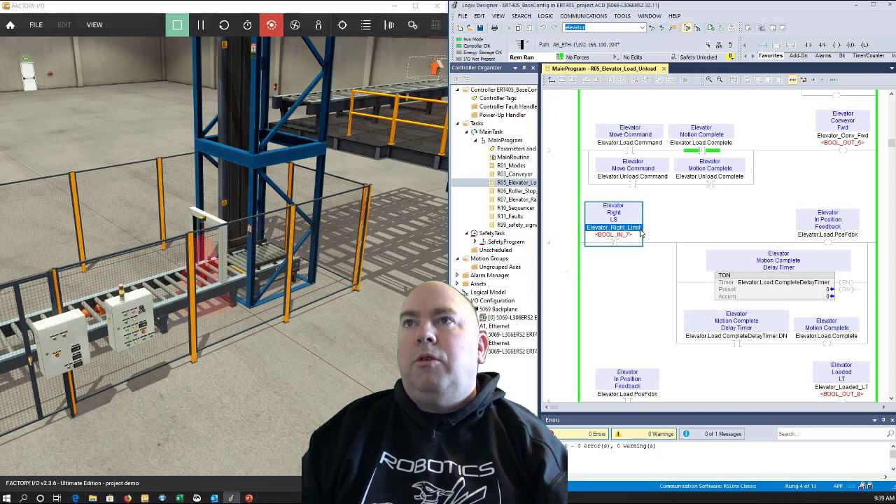Okay, we're going to finish this off here. So, a couple problems that I had that I've sorted out kind of offline. I was messed up on how to do the elevator load position feedback. I was looking for two switches here, the elevator right and the left limit. My problem is, bring this pallet in here. The pallet only makes one switch at a time, so it would not actually make both switches.

So you'll see when I bring this pallet in here, I'm going to do a load, which is this one here. There. I am now load. It is complete. So I cannot run that. I'm actually pushing the load command right now. I have load complete, so it won't let that conveyor, those rollers run anymore.

So where I am there now, now I can actually run this up to whatever position I want to go. And I take it up there, and now I should be able to do the unload. I can do that, but because that other conveyor is not running, it kind of gets out of there. I need to have all the conveyors running together to make this really work properly. Now that should be clear, and then I can bring this guy back down. So that's basically working in manual. So I proved out manual on that.

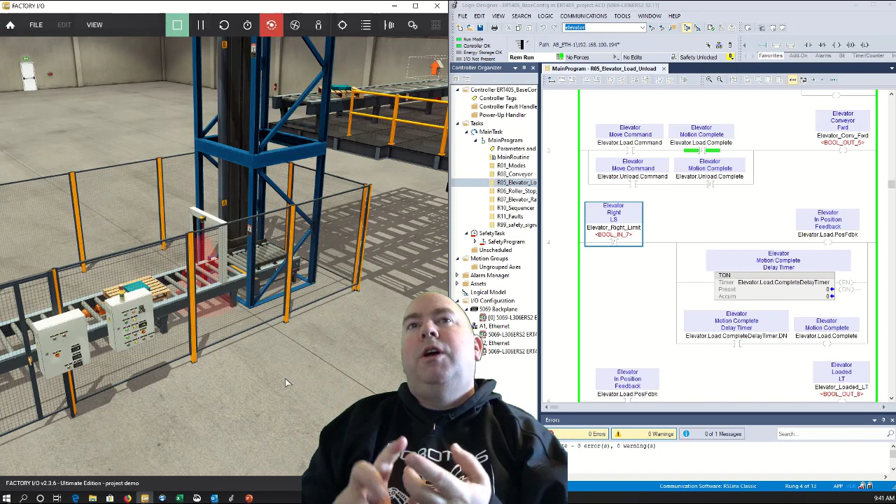So at this point, I've basically proved out manual function. It should be time to say, okay, I basically proved out manual once we've done that. So I've proved out safety. That was the very first thing to do. Got to have safety, because if you don't have safety, you can't shut things off if things go wrong. After that, prove out the rest of your I/O. Make sure what you think is showing in your PLC.

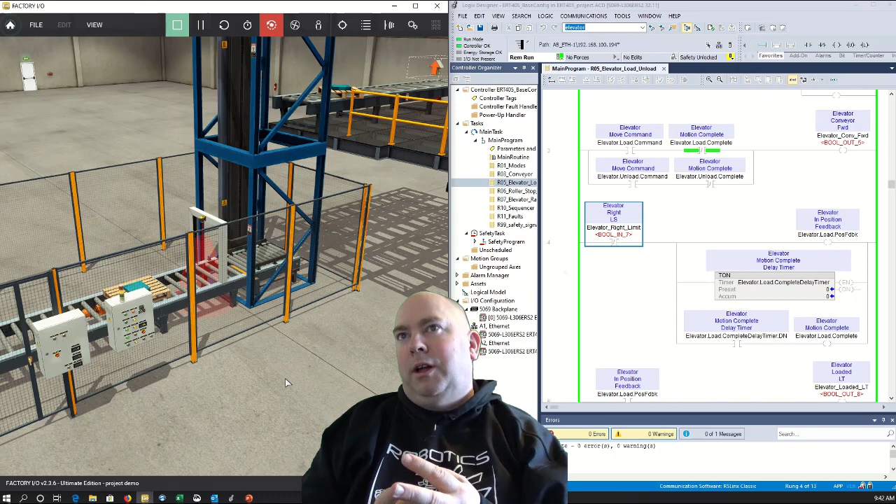So if I say I want to turn this motor on, make sure when I put that onto my PLC, that is what is actually running on your machine. So that's proving out both your wiring and your aliasing in your tags and stuff like that. Then if you can do that, you know all that stuff is working properly, then you should be able to prove out your manual motions, which we've just done. I've now pushed buttons to make everything move, and everything moves properly. I'm getting the right feedback everywhere, so my switches seem to sense properly.

So my next thing I'm going to do, I am going to put this thing into auto and see what happens, and then debug the auto sequence as we go. So turn this over here, green light, that means I'm in auto. I'm going to push auto start. I guess I should probably first of all return everything to home position. So there, I am at home position for everything. Don't know why I still have this light on here.

Let's go check that out. I still have the raised position. The elevator up light is on. Raised position feedback. Alright, so this is

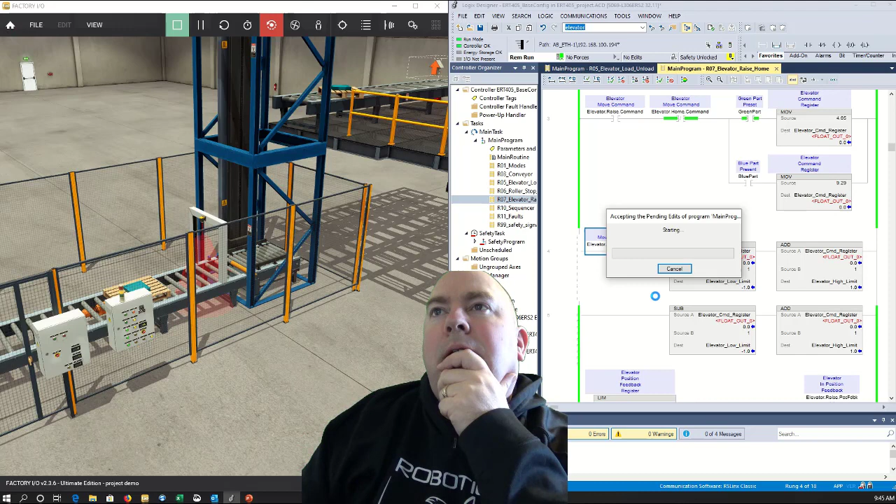That should fix that. Let's just set this to 3 and 5. And then that goes away. Okay. There we go. So that's all good. And now at home position, put this in auto. Auto cycle start.

Alright. That wasn't completely smooth. And we're jammed up now. Alright, that's pretty typical of a machine startup. Okay, so what happened there? Let's see. So as soon as that was in position, let's watch that again. Wait for another pallet to come along here. Okay, pallet releases every 30 seconds.

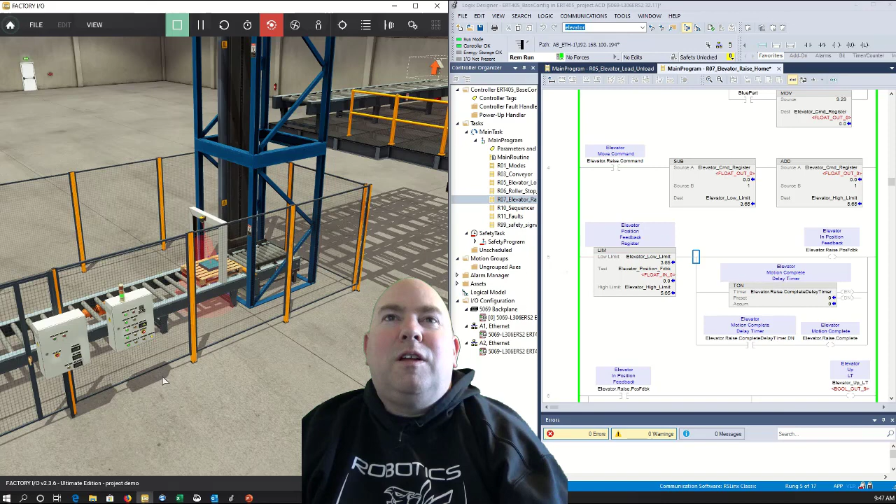So roller stop. Let's set this back to 0. Okay. So we're going to go up. So that started running before we were in position. Okay. So we get our raise position on too soon. So we need to have a time delay on our raise position.

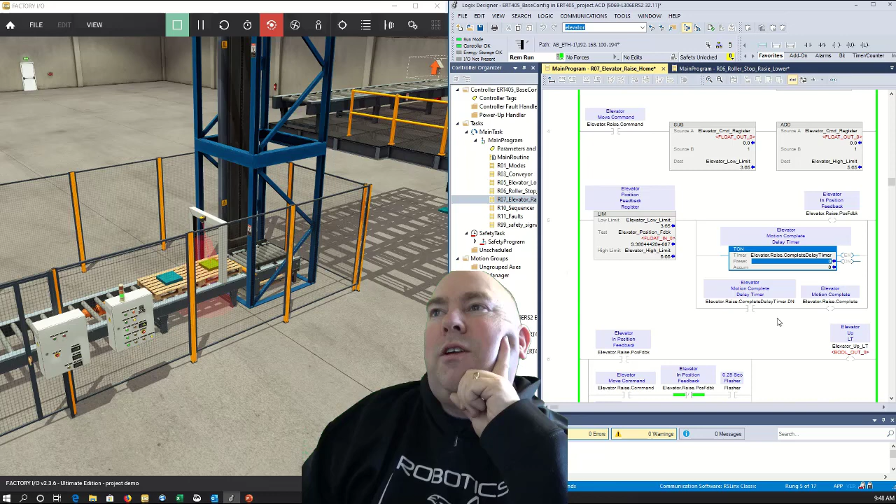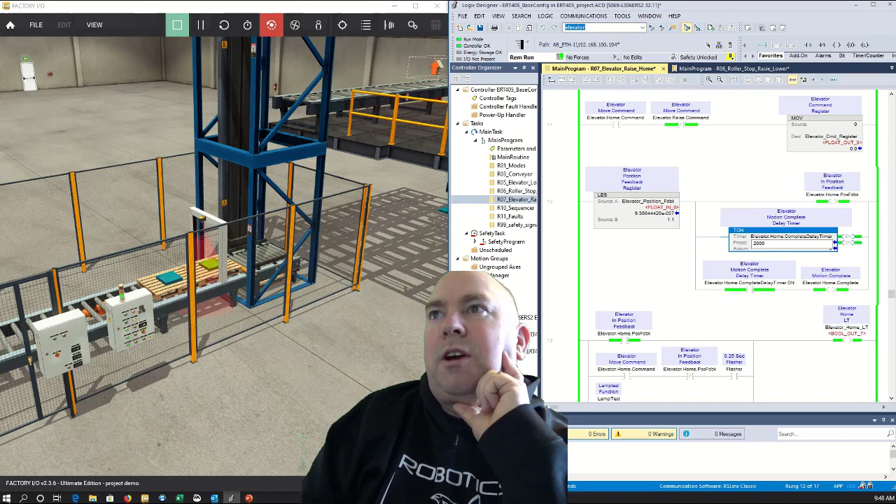Alright, so yeah, we have no time delay here. So let's put like a 2-second delay in there. Second delay on that position. So basically as soon as it got to within that acceptable range, it said we're raised, we're going to start unloading. That's why we have these nice little delays in here. So we're in position and settled.

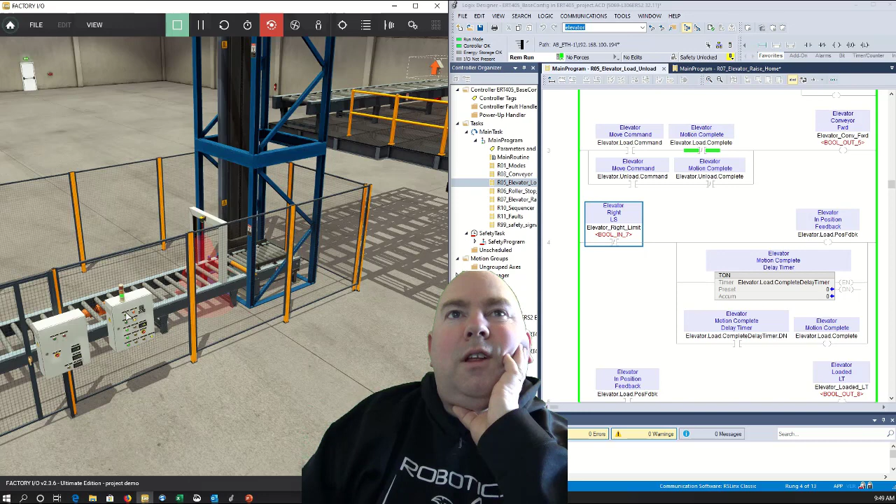Make sure we have a delay everywhere. The load stops, those are already good. Alright, let's try this again. This is machine startup. Figuring out the problems, find out why we're dumping parts everywhere, and figure out what it was, fix it, try again. Hopefully we don't break too much stuff along the way. And right now I don't have part detection logic, so I don't have logic that shows what the

I need to reset my sequence. It's not getting all the way through the sequence either for some reason. Alright, so there we go. 2 seconds. Move up. 2 seconds. Run out, clear. 5 seconds to clear. Run back down. Now we're on step 7. What are we waiting for at step 7? Gantry ungrip. Why is that in there? Elevator home complete.

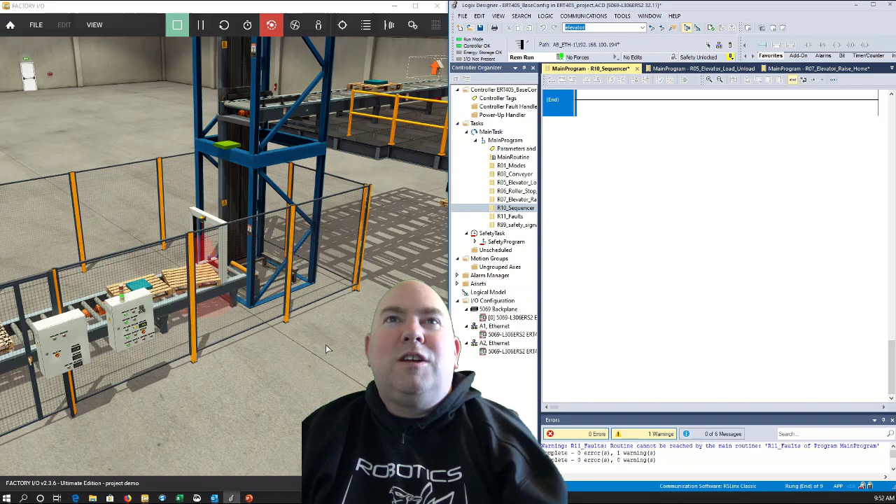You can also see that, yeah, this remover is not in the right position. Pallets are just sliding underneath it. Fix that later. But sequence-wise, this is good. Looks like we got the sequence figured out. That's saying they're just going right underneath that.

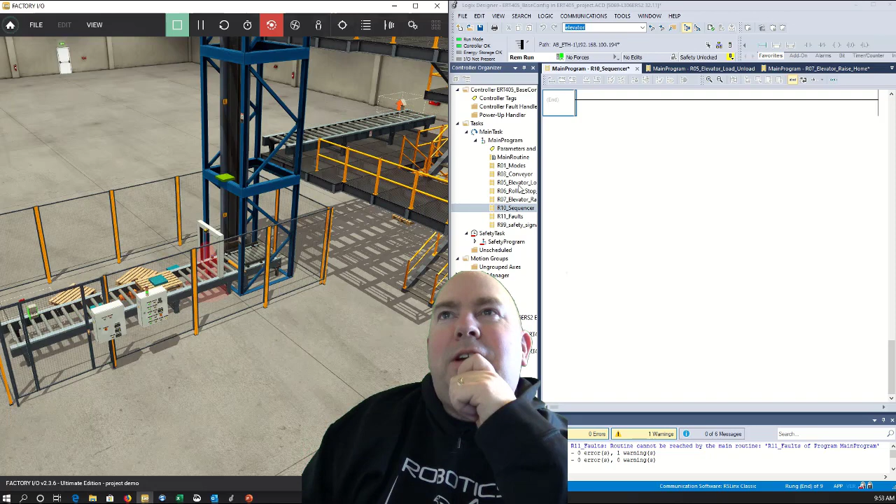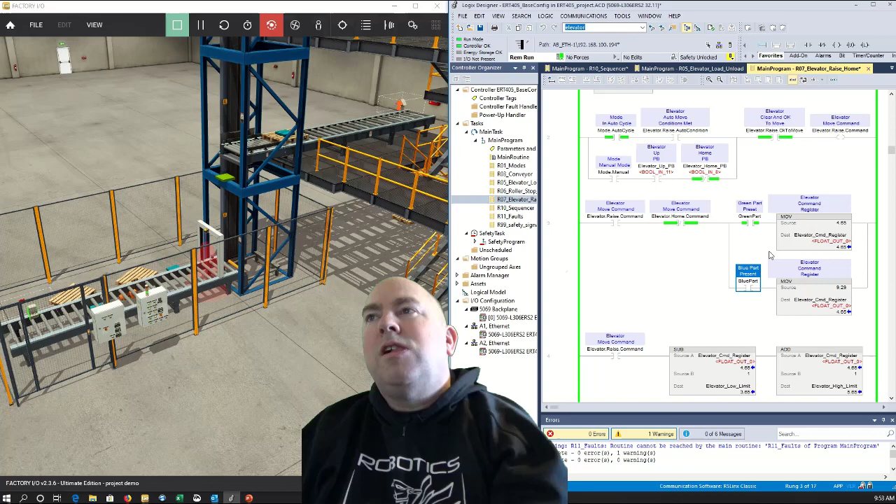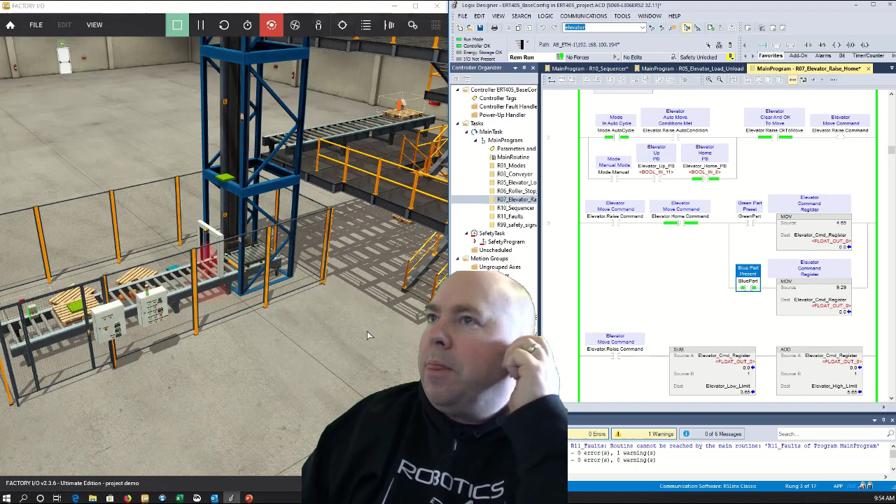Alright, let's change this to say that there is blue part instead of green part. So now this should go to the top level. Alright, so that's running pretty good.

So let's add in our part detection logic. So let's go add a new routine. Let's call this R12 parts. This is very similar to logic we've done before in the other programs. I could just copy from one of those. So we're going to get a blue part.

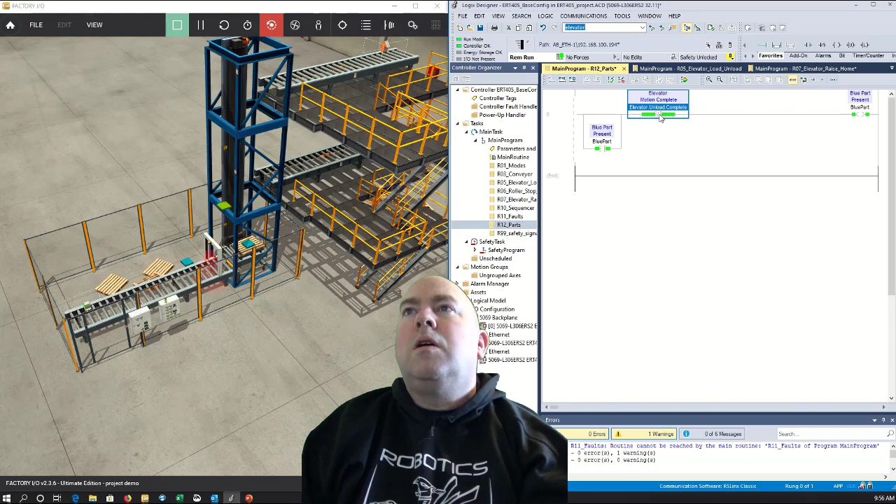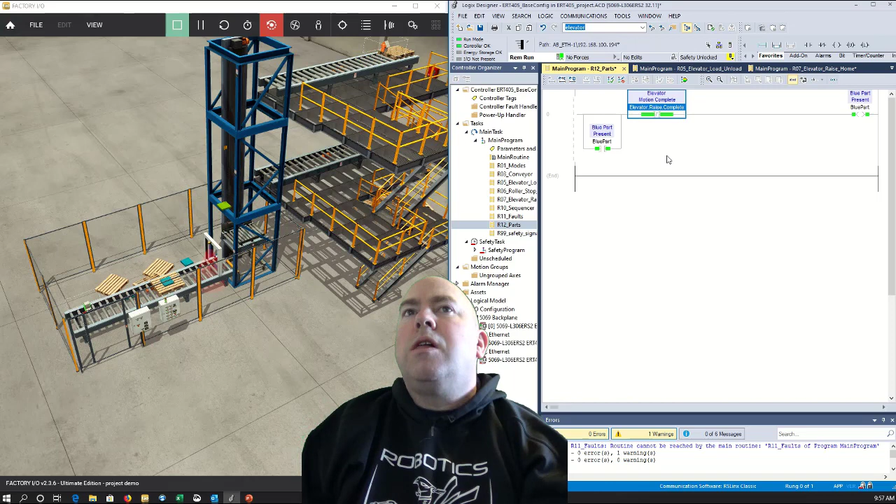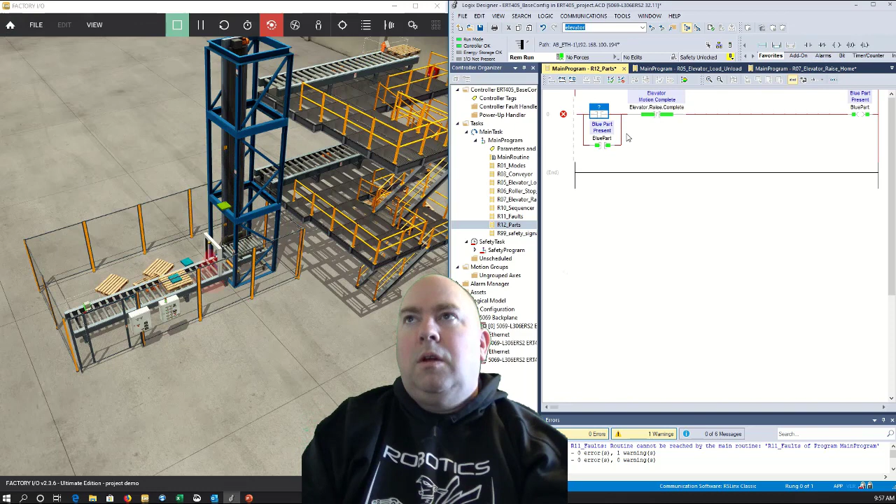So raise is complete, I think. We'll reset this. Yeah, that's good. Okay, so let's look at the bits here. Vision sensor. We gotta figure out what the pattern is that defines blue part. There's 4 bits we get from this. Some of them are on, some of them are off.

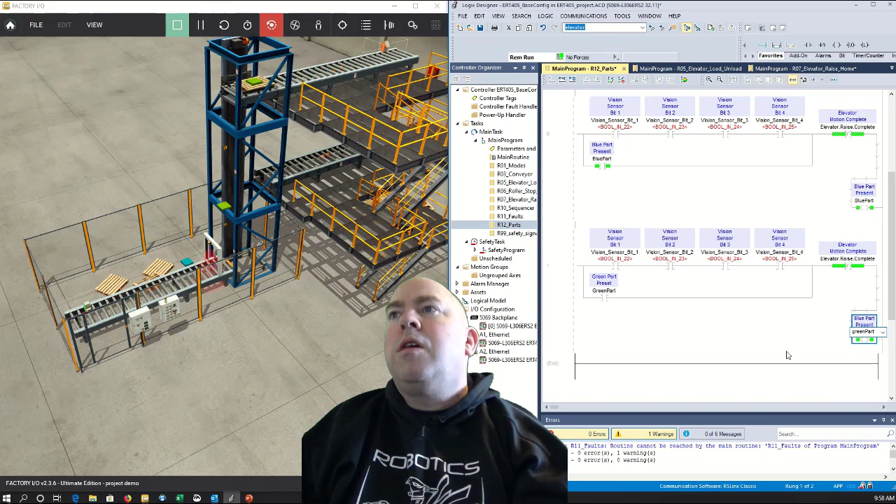Bit 2, bit 3, bit 4. So bit 3 is a green. So we've got green and blue here. So let's watch next time green comes through. So blue, we got a blue coming through here. Let's watch what makes up a blue. What combination of these makes a blue? So bit 1 only. So bit 1 is on, all the rest of these are off. And I think it was bit 3 is on, all the rest are off, make it green. I guess we saw in the last one. Let's try that and see if that makes the correct combination here.

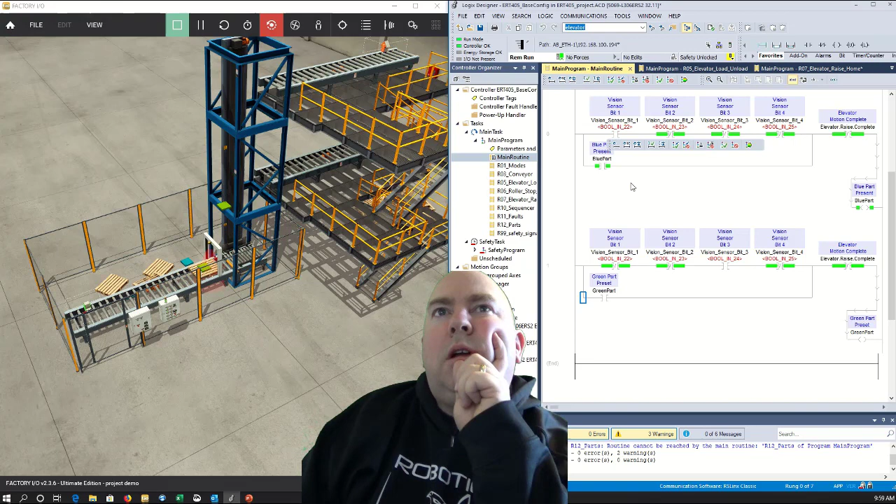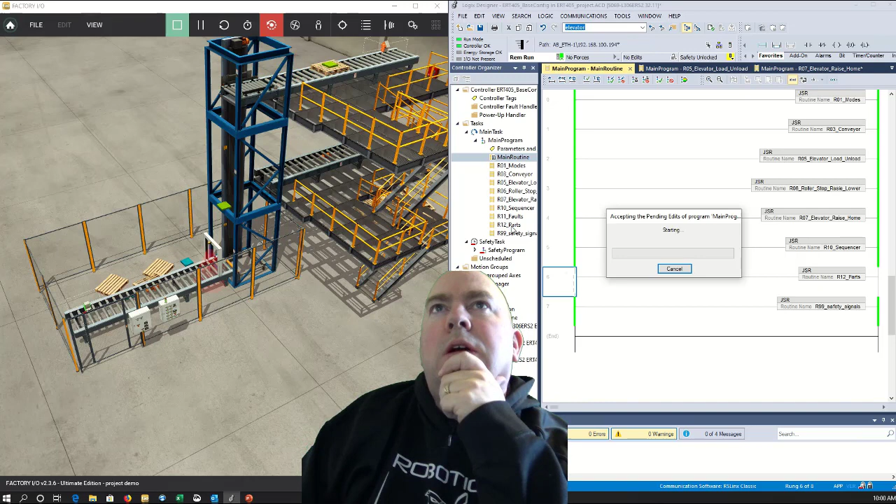We'll see if that will set. Well, we need to scan this logic as well. Alright, let's watch the next one. So this should turn on green part for us. Alright, so green part came on. So we got that combination there of bit 3 is on, all the rest of the bits are off. We get green part. This is going to reset once we get that our raise is complete. We're all done with that. We should go with the green part as well.

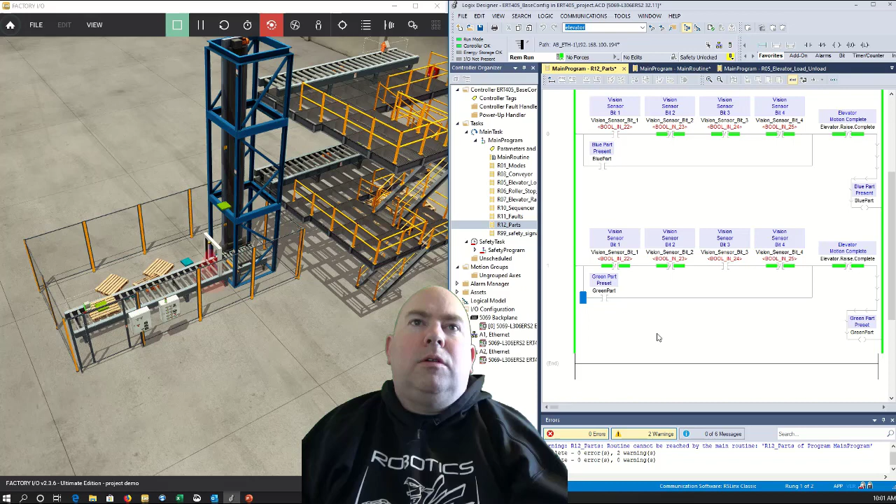And now we, come on, let's get a blue part. Hopefully this detects blue. Alright, blue part. Cool. Alright, so that works. Part tracking is good.

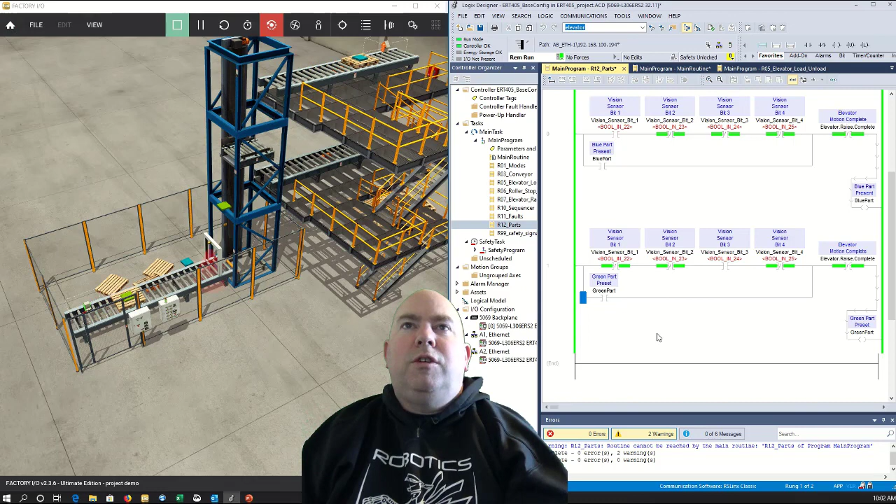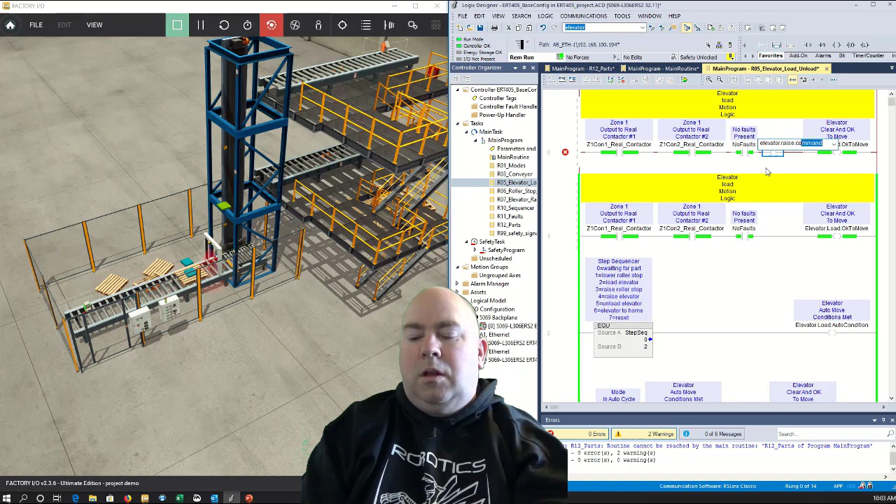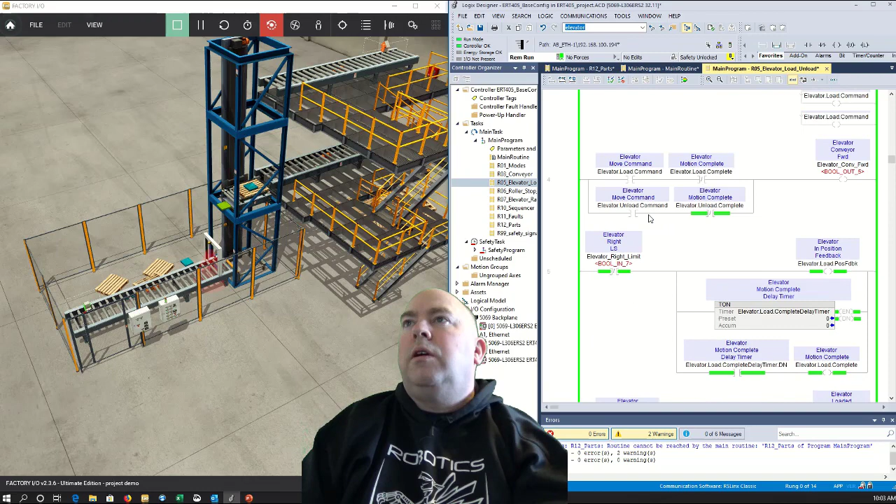So, let's look at collision conditions here. What could be bad? We only want to do a load if we're in the home position. We only want to do an unload if we're in the raise position. Let's start with that. So load is only okay if we are in the raise. Sorry, other way. Load is home position.

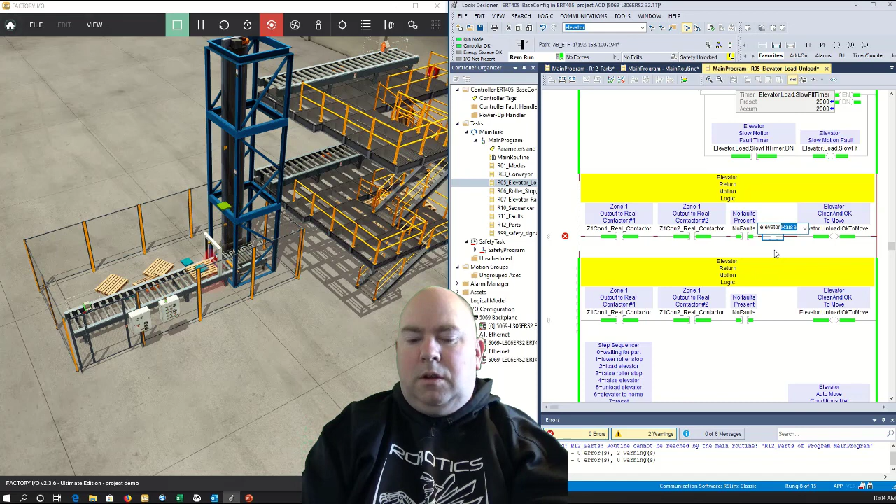This one is elevator dot home dot complete. So we want to do those. Roller stop. Roller stop should only lower if elevator is home. That way we're not going to drop a pallet in there accidentally. I think that's about it. We'll go with those. Let's test our safety here.

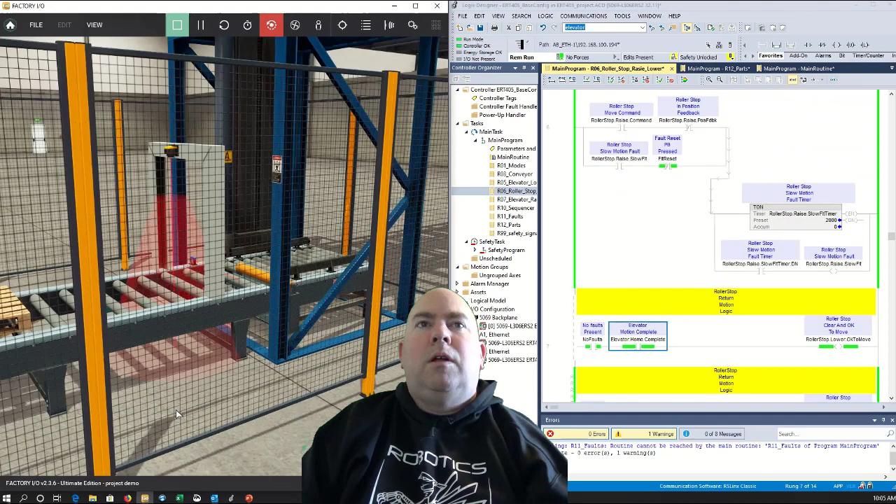Let's hit an E-stop while this is moving, see what happens. Alright, so see how that froze it in place, everything stopped. The way that works on the elevator, we put this thing at the end down here that said if we lose our safety, so if we drop these safety contactors, look at what your current position is and move that into the command register. So that should just copy where we're at, move it to the output command, and that should just freeze this thing where it's at. Take that out and do a reset. It's going to carry on.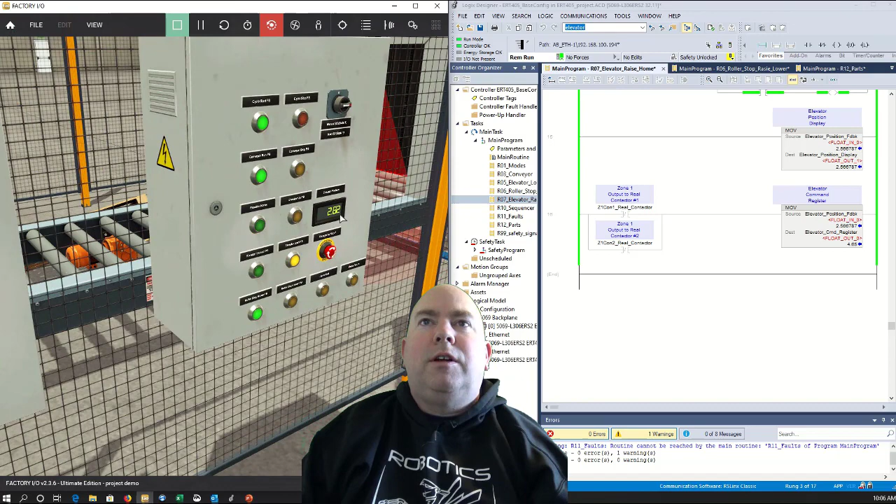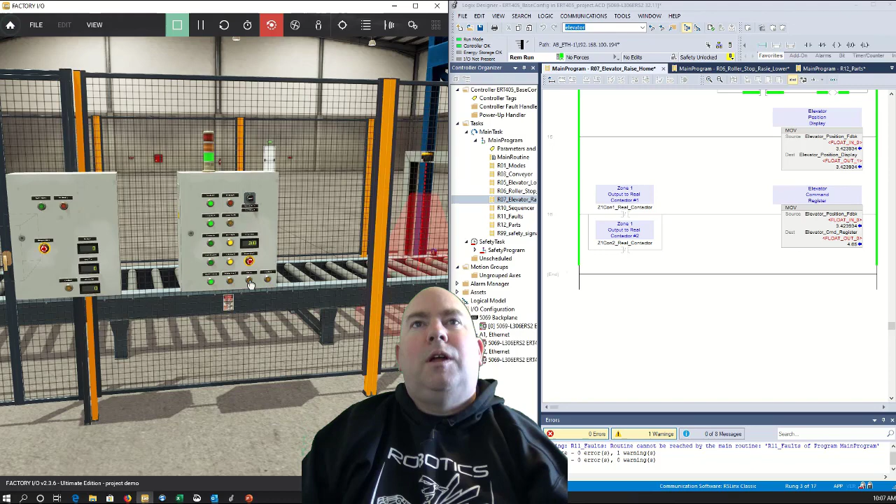Some other things to look at here. This actually tells us the position of the elevator. So that's counting up. That's 4.65. Back down to 0. Oh, let's test our lamp test. Lamp test lights everything up. What else we got here? Okay, so everything functionally seems to work now. Let's do the data. So we need to do our data collection. We'll finish that off in just a minute here.

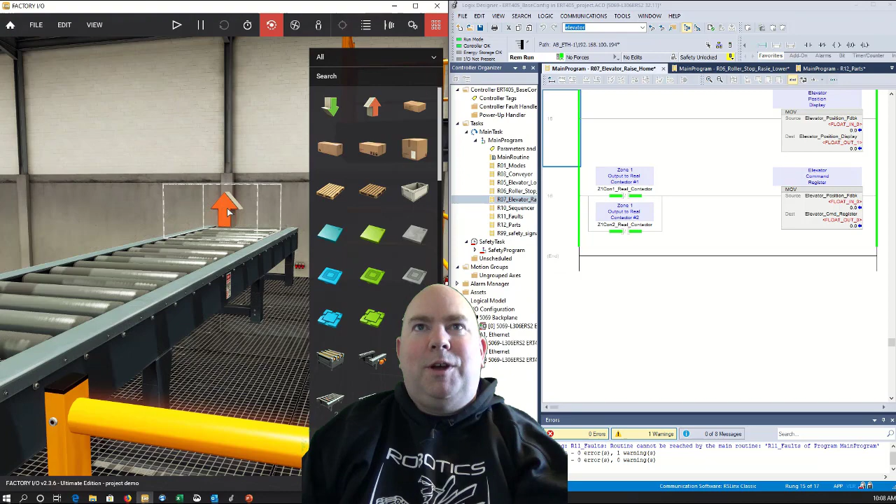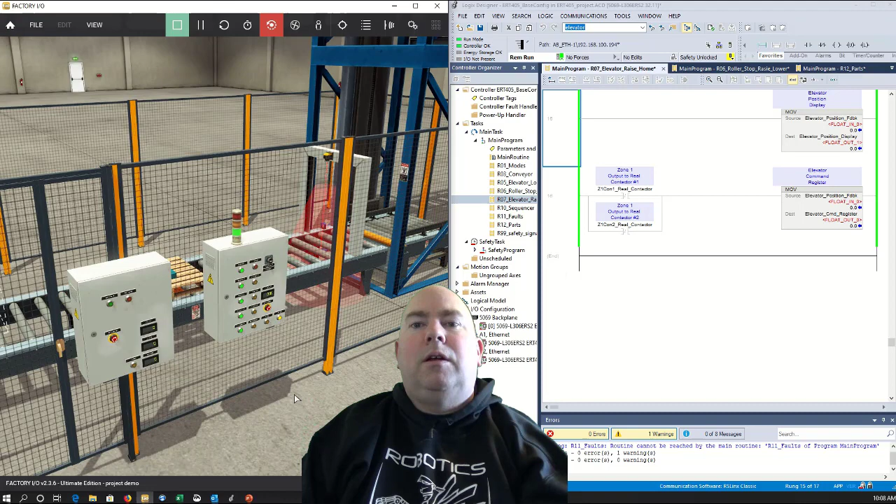Two other things I'm going to do before I do that. Let's move these removers, drop them down. That's why these pallets are going right underneath those. Let's drop those down so the pallets don't just stack up on the floor. Alright, and I'm going to do one more recording here where we'll do the data.